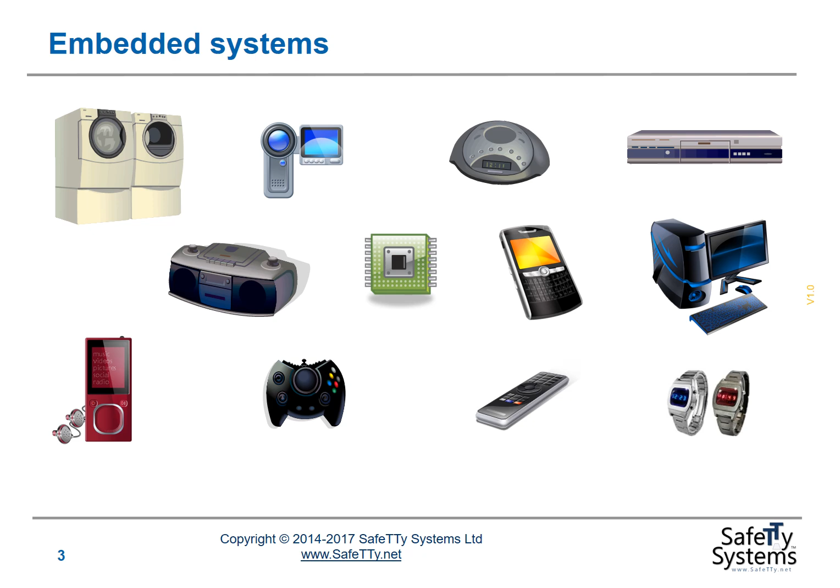I'm going to begin with some basic background to get us started. There are a very wide range of embedded systems across the planet. By an embedded system, we usually mean some kind of computer-based system that to most users doesn't look like a standard computer. So we have a range of different possibilities indicated on this slide.

Our focus on this course is going to be on two broad categories of embedded system. The first category is reliable embedded systems. Everything we'll be discussing on this course is intended to be reliable. One of the primary motivations for creating reliable embedded systems is to avoid the very significant cost of repair or significant costs related to the system failure.

For example, if we have a satellite system, the cost of repair is vast. We have to recover the satellite perhaps in order to effect repairs to the system. If we're lucky, we'll be able to upload a new version of software perhaps to our satellite, but if the component that's responsible for uploading the software fails, then we're in trouble.

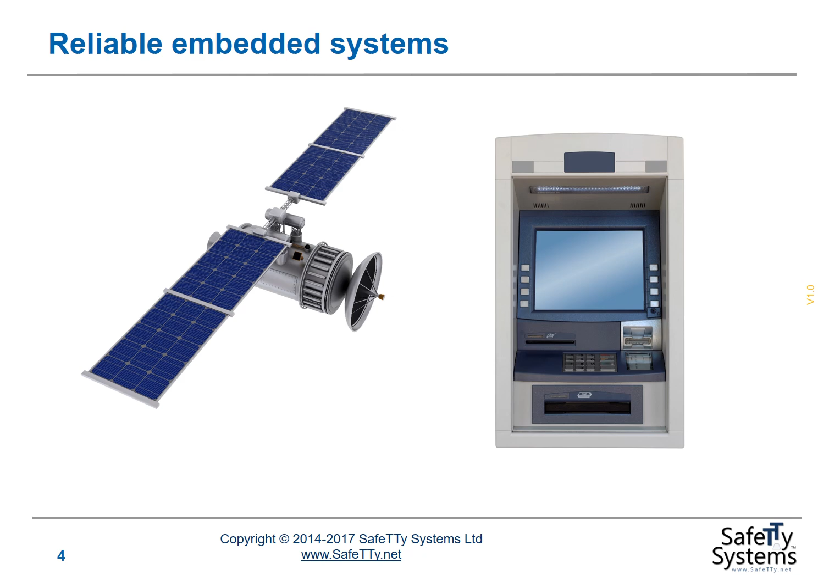The next main category and our key focus throughout this course will be on safe embedded systems. So these are the kinds of systems where if they go wrong, someone is likely to be injured or killed. So for example, very simple example, a washing machine. That will be familiar to many people that are joining this course.

One of the key safety challenges with such a machine is that if the door lock fails, it's possible to open the door while the machine is spinning a large metal drum at high speed. If you, or particularly a small child, manages to insert his or her arm into that drum while it's rotating rapidly, they could be very badly injured, or in the case of a small child, they may even be killed.

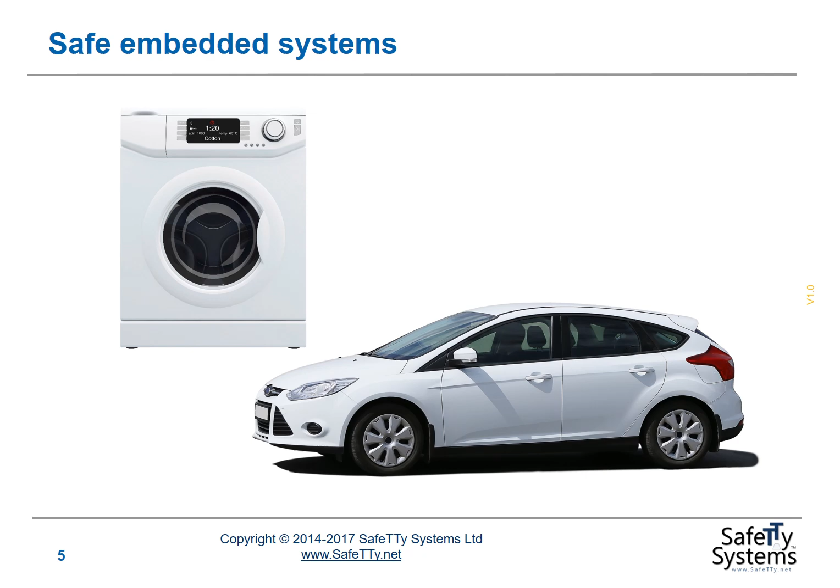In automotive systems, there are many opportunities for failure. Failure of the braking system, failure of the steering system, increasingly a focus on advanced driver assistance systems, adaptive control systems in the car, self-driving systems, self-parking systems. In many of these cases, failure of the system is again likely to cause severe injury or death to passengers, other road users or pedestrians. Again, we need to avoid such problems.

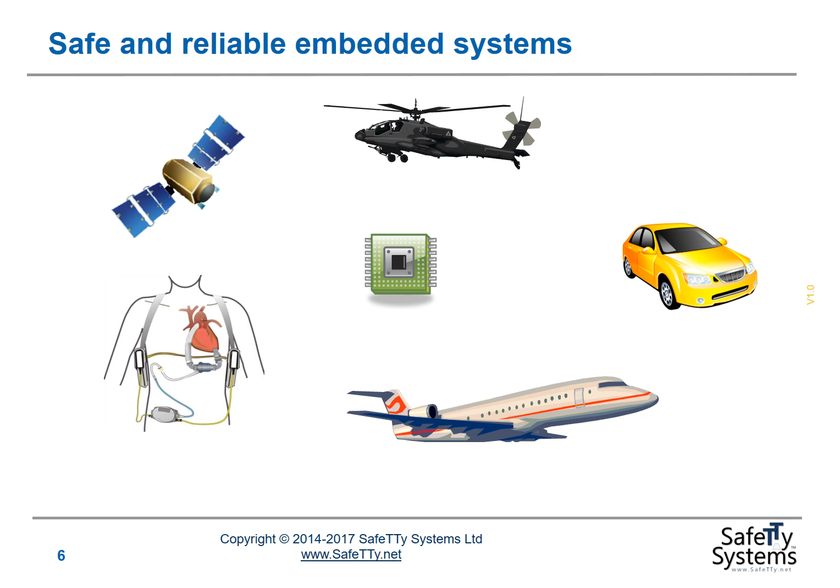More generally, it's simple to summarize the requirements of real-time systems as saying that we're concerned not only with the functional behavior of the system, that is what it does, but we're also concerned with the time at which this activity is carried out. For example, if we have a braking system in a car, we may get a perfect braking response, but if it takes 5 seconds to produce that braking response, we don't care. We'd rather have a less than perfect braking response on time rather than having to wait too long for the perfect response to be created by the system.

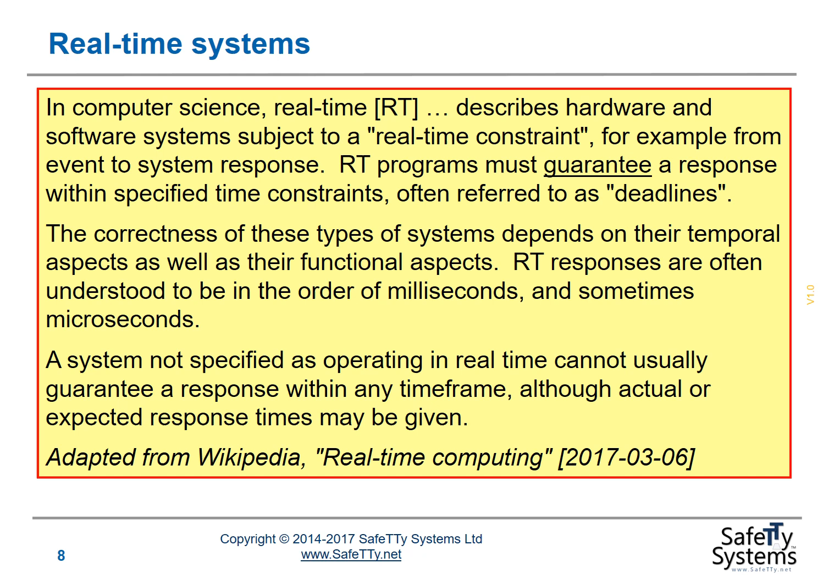So time, the time at which outputs are created, in particular inputs are measured, is crucial in many real-time systems that we'll be discussing during this course. Let's look at a couple of examples.

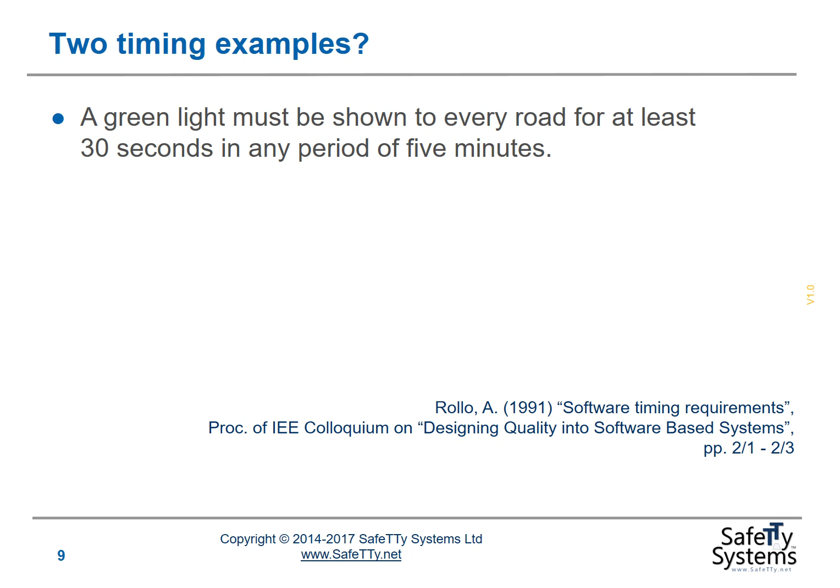This one's straightforward. It's part of the description that might be used in a traffic light system. A green light must be shown to every road for at least 30 seconds in any period of 5 minutes. So this might be used to describe traffic lights at a junction, at a crossroads, where we want to allow traffic from the two crossing roads to have some kind of opportunity to move. We want to avoid jamming up the traffic by ensuring that each part of the crossroads is able to operate as required.

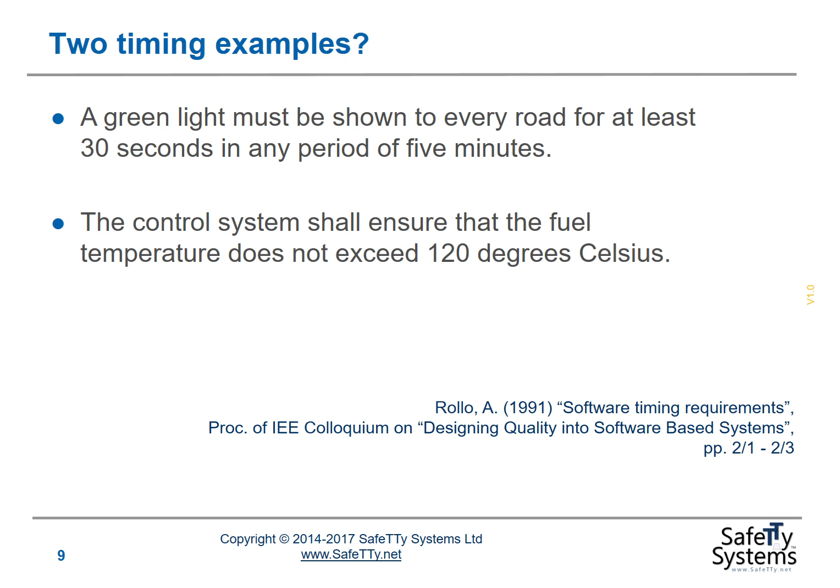If our periodic measurements don't happen when we expect them to, if one timing measurement is very delayed in our system, then we may miss a high temperature value, which happens briefly in the system. If we miss such a value, this may, we assume, be dangerous in this particular application. So sometimes timing requirements are explicit, as in the first case here. Sometimes the timing requirements are implicit, and we have to think about them a little bit more carefully during the system development.

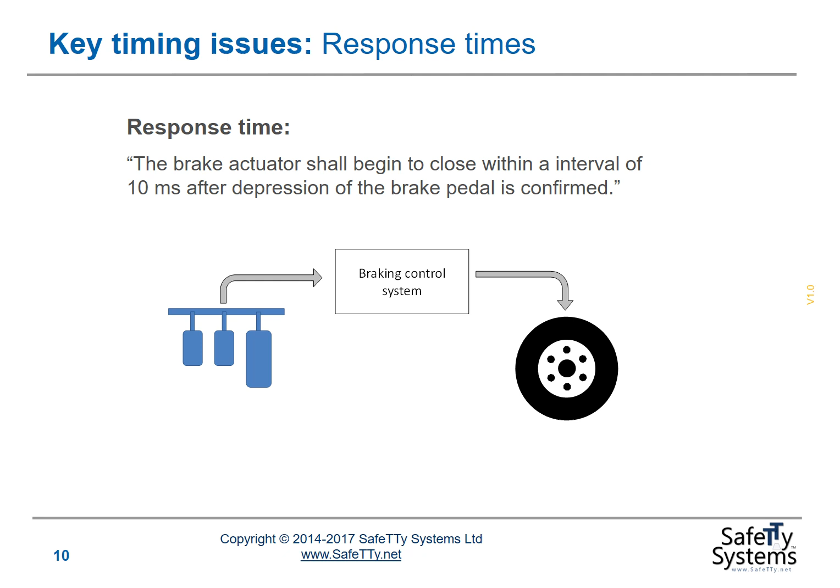Here's another typical timing requirement. In this case, we're looking at response time. In this example, we're saying the brake actuator shall begin to close within an interval of 10 milliseconds after depression of the brake pedal is confirmed. A fairly straightforward response time requirement. We'll say much more about this type of requirement and how we can meet these types of requirements and demonstrate that we've been able to meet these requirements in this course.

We might need to respond to errors in the system. Here we're suggesting that we may need to be able to detect the failure of the main pressure sensor in a system within a specified period. And we must be able to engage a backup sensor, again within a predetermined period.

Again, we're then looking at internal errors, where any critical task exceeds its predetermined worst-case execution time by more than 2 microseconds, this shall be detected. The overrunning critical task shall be removed from the schedule. The corresponding backup task shall be scheduled as a replacement. Again, we're going to look at mechanisms that would allow us to achieve this later in this course.

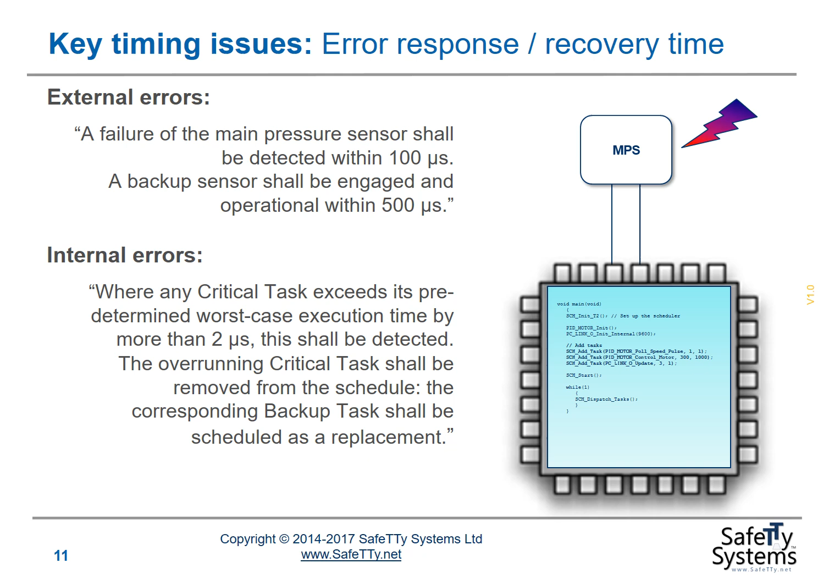One of the first basic timing challenges that people come across often is one of CPU loading. Your system may come with a requirement from the customer that the CPU load shall not exceed 50% at any time during normal system operation. In many cases, it's very difficult to guarantee this. We'll look at techniques that allow us to confirm at design time that we'll be able to meet this type of requirement.

One of the reasons why this type of requirement is useful is that if we're able to model the system and understand exactly what the CPU loading is, we'll be able to answer questions such as the second one on this slide. So we'll know whether it's possible for us to add another task to our system without having any impact on the existing task set. This is a key requirement in many projects. Very often, additional functionality is added late in the project. We want to be able to avoid having to retest very large parts of the system during the project if we can avoid doing so. The techniques that we'll be discussing on this course will allow us to achieve this.

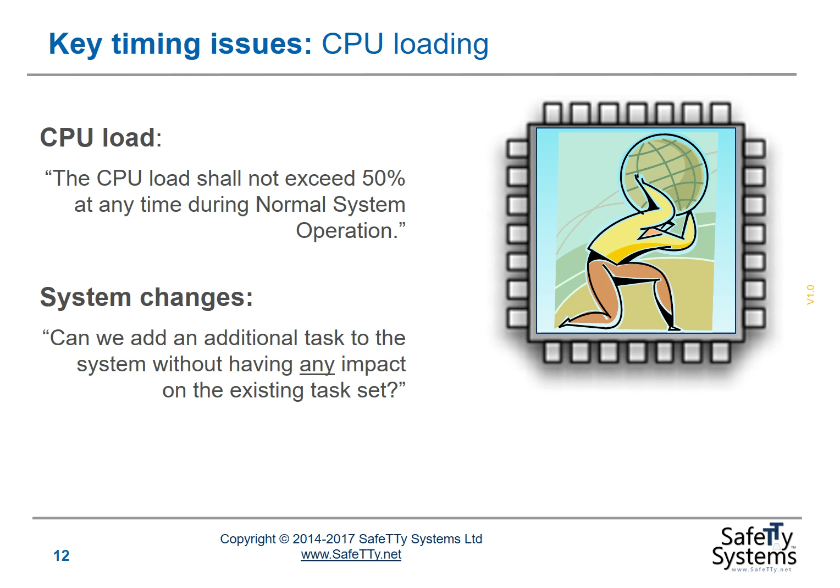Task jitter is another one of the issues that we're going to consider during this course. Jitter refers to a variation in timing. So for example, in this case, let's assume that this represents a sine wave that we're trying to sample. So we want to sample at the point indicated by the arrow here. Instead, we have a slight variation in the timing at which we sample, delta t here. This gives rise to a small variation in the voltage that we sample that's indicated on the graph.

If you have a look at the ERES2 book, and I'll give you a full reference to that book in a minute, you'll see in one of the appendices of that book a demonstration that if we have jitter here of more than approximately 1 microsecond, we'll start losing information even in this very simple sampling task. So we're sampling a 500 Hz tone using an 8-bit ADC, which is a very modest requirement. If we have more than 1 microsecond of jitter, we will not manage to perform this task successfully. Effectively, at around 1 microsecond of jitter, this will become a 7-bit ADC. With a bit more jitter, it becomes a 6-bit ADC, and so on.

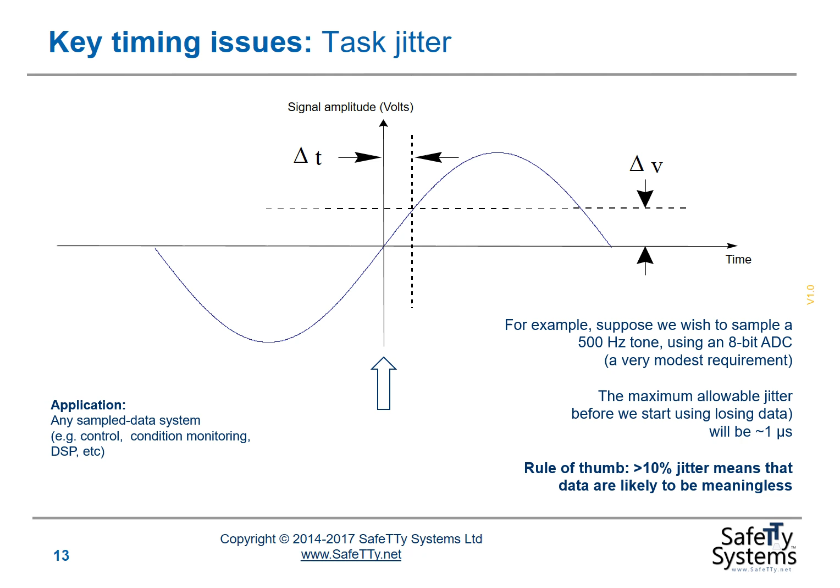We need to understand the level of jitter that we're going to see in our system so that we can be sure that this jitter will not be excessive. As a general rule of thumb, jitter levels greater than about 10% in a periodic task means that the data that you're working with are likely to be meaningless. We'll look at techniques that allow us to model the level of jitter in our systems later in this course.

So now let's consider briefly, as part of our introduction here to the material that we're going to cover in this course, some basic safety requirements. We're going to look at a range of different safety integrity levels during this course. At the basic level, at SIL 0, or in automotive terms QM level, we have very limited safety requirements.

At the other end of the scale, at SIL 4, or what is in an aerospace domain level A requirements, we have very severe requirements to meet. So for example, a level A requirement might be applied to the control of aircraft engines in a civilian aircraft.

If you're used to working with automotive designs, possibly in compliance with the international standard ISO 26262, which we'll say quite a lot about during this course, the highest standard there is ASIL D. There's a level above that that's used in some other standards, but still achieving ASIL D, which is roughly equivalent to SIL 3 in the generic IEC 61508 standard, is challenging. We'll look at techniques that allow us to achieve these safety integrity levels during this course.

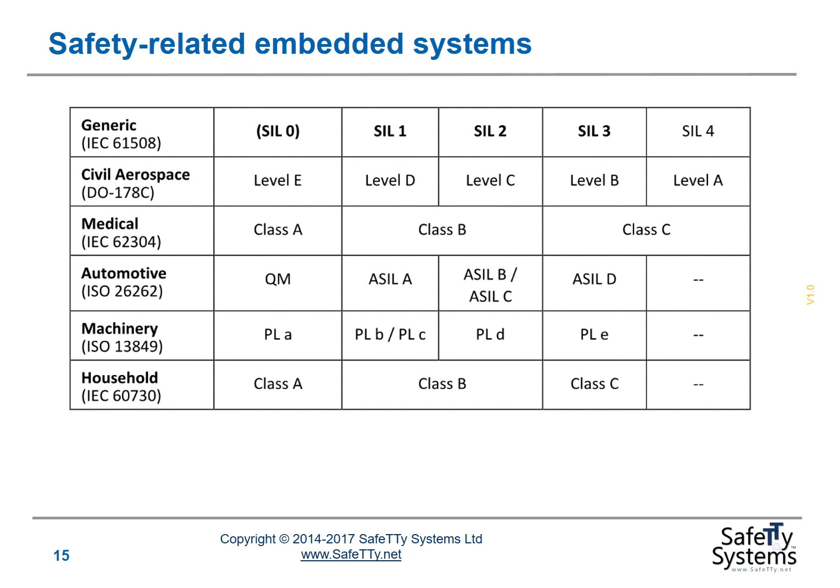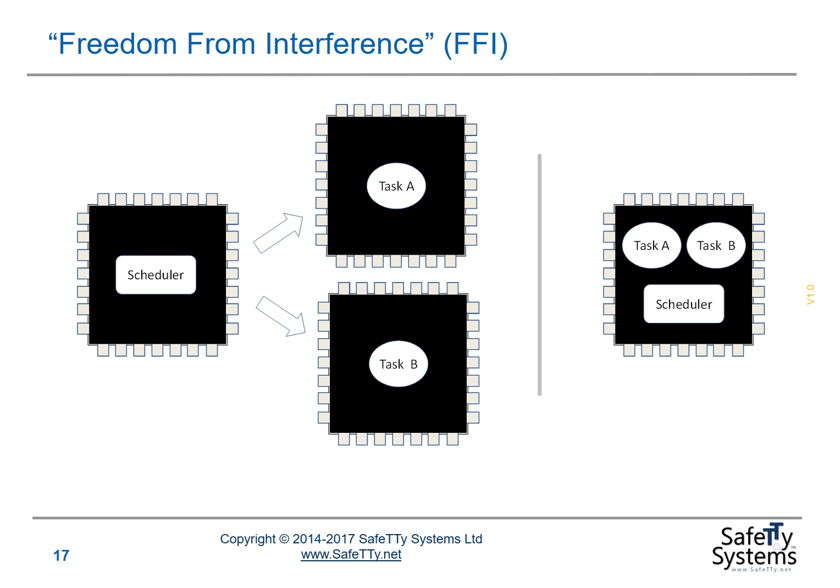Let's just look at one example of the kind of challenges that we face in a safety-related system. And this is a freedom from interference requirement. Task A and Task B in this design. If you tell me that you've got a design and you can guarantee that Task A won't interfere with Task B, and both tasks are running on the same microcontroller in a situation like this, I will be skeptical. I won't necessarily believe that you're able to achieve that, because there are so many ways in which the tasks can interact with one another.

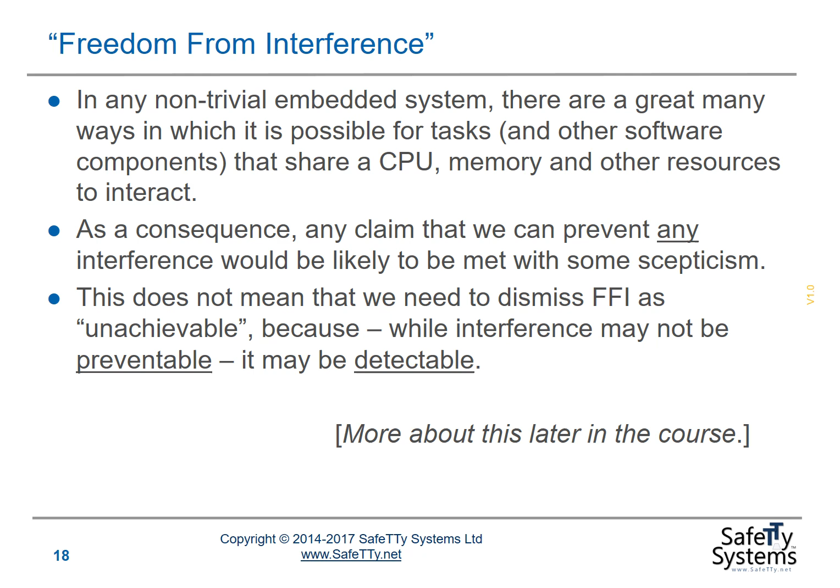If we can't achieve a guarantee that the tasks cannot interfere with one another, what we may be able to do is to detect that one task has interfered with another task. That's in itself very useful. If we can detect that interference has occurred, we can often avoid many of the most severe consequences of unintended interference between tasks or other software components running on the same processor. We're going to say more about this later in the course. But detecting interference between tasks is another important consideration in many reliable and safety-related systems.

So, in this course, we'll be considering a range of safe and reliable embedded systems. We'll need to meet tight timing requirements in some cases, meet the requirements of real-time systems. We'll often need to meet specific safety requirements in compliance with one or more international safety standards. How are we going to achieve this? The focus of this course is on achieving these goals using time-triggered software architectures.

As a very brief summary, when we say that an embedded system has a time-triggered architecture, we mean that it executes at least one set of tasks according to a predetermined schedule. The schedule determines the order of the task releases, the time at which each task is released, and whether one task can interrupt or preempt another task. In practice, this usually means we'll use a bare metal software platform: no RTOS, no Linux, no Windows.

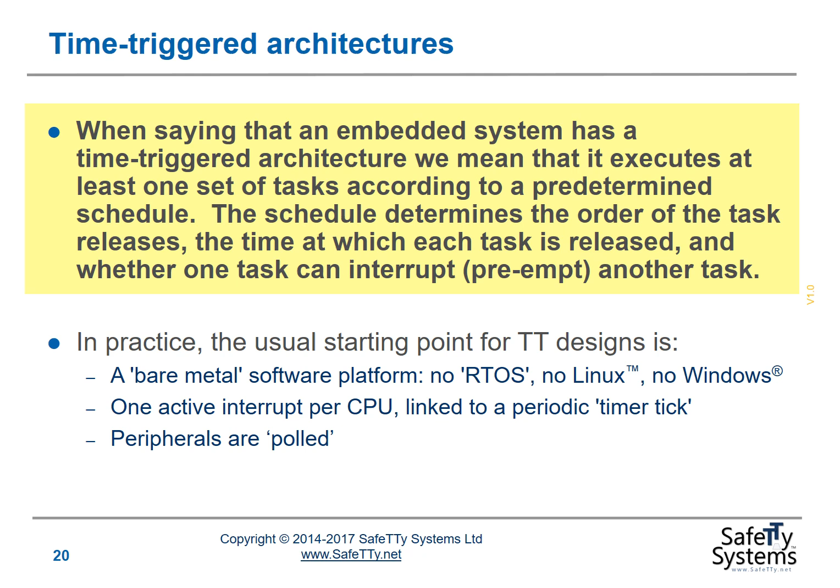We'll also use just one active interrupt per CPU as a starting point for our design, and this interrupt is usually linked to a periodic timer tick. We're going to poll all the peripherals on our system. So that's a starting point for our system development, and that's how we're going to achieve our safety and reliability requirements on this course. We'll say lots more about time-triggered architectures, what they mean and how they can be implemented throughout the course.

One way of viewing what a time-triggered architecture is, is by considering event-triggered systems. Event-triggered systems, with which many people watching this video will be more familiar, typically involve one microcontroller with multiple interrupt sources enabled. So we might have an interrupt connected to a CAN bus, an interrupt connected to another serial interface, an interrupt connected to analog to digital converters, etc. So we have multiple interrupts, different levels of interrupt priority, perhaps a real-time operating system involved.

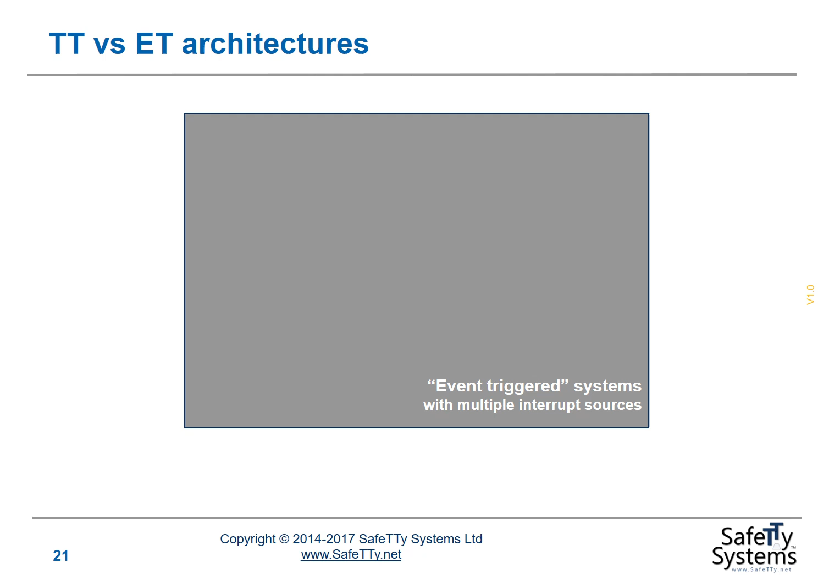What I'm going to argue on this course is that's a general class of useful systems. TT systems form a safer subset of that kind of system. So what we're describing on this course in many ways isn't new. It's simply saying, okay, multiple interrupts, for example, an RTOS, for example, these are generally fine. There's nothing wrong with these approaches.

But if you want safety and reliability, sometimes you have to accept a few constraints on the way that we put the system together. The end result is a TT system, which is going to be the focus of what we discuss during this course.

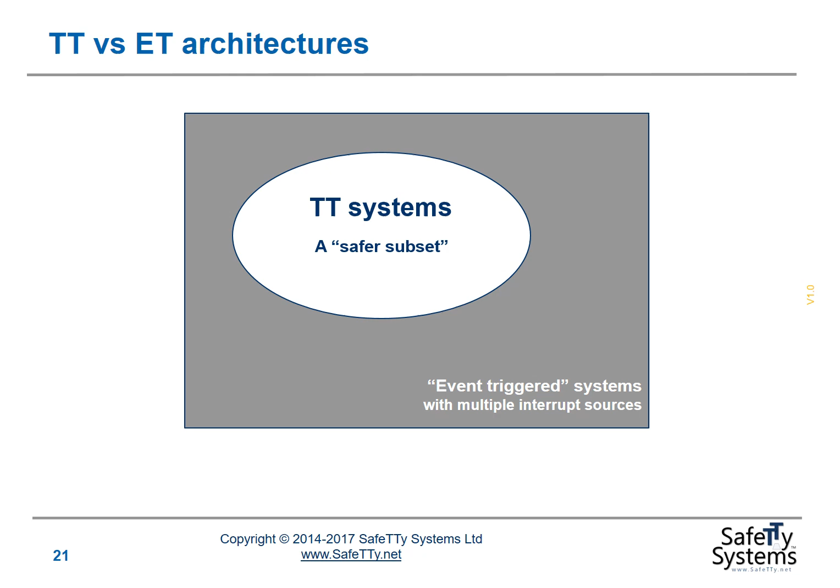Static synchronization of access to shared resources, which is a key characteristic of all TT designs, is recommended for SIL3 systems and highly recommended even for the most safety-critical systems that are considered in IEC 61508.

Limited use of interrupts, another key defining characteristic of TT designs, is recommended for the lower level systems in IEC 61508 and highly recommended for high level systems in this standard. We'll say lots more about this standard and the ways in which we can meet this standard during the remainder of the course.

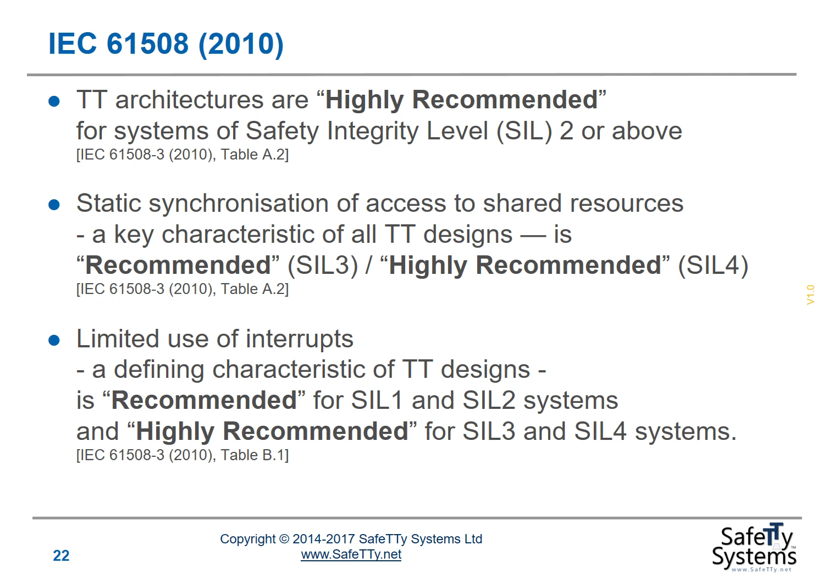So, in overview, this course is intended to help you to understand how time-triggered architectures can be used to create safe and reliable embedded systems. During the videos, I'll compare time-triggered and event-triggered solutions. The material that I present is intended to help you think about what will be a new way of developing embedded software for most people that watch these videos.